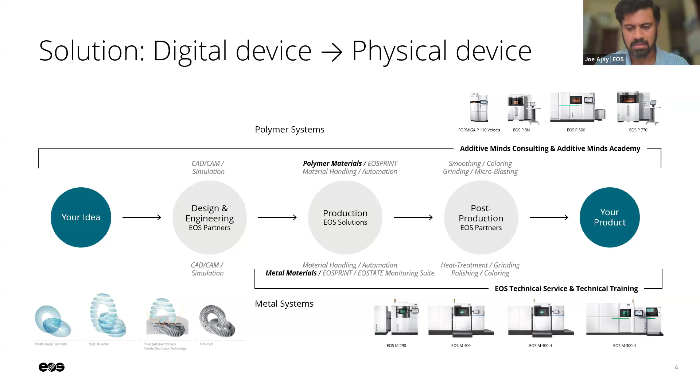Additive manufacturing has been around for quite some time in this industry. There are multiple different technologies, and at EOS we work on laser powder bed fusion. The raw material is in the form of powder. We spread the powder over a platform and use lasers to melt it, and layer by layer we build the product. As simple as that. Sounds simple, but very complex engineering is involved.

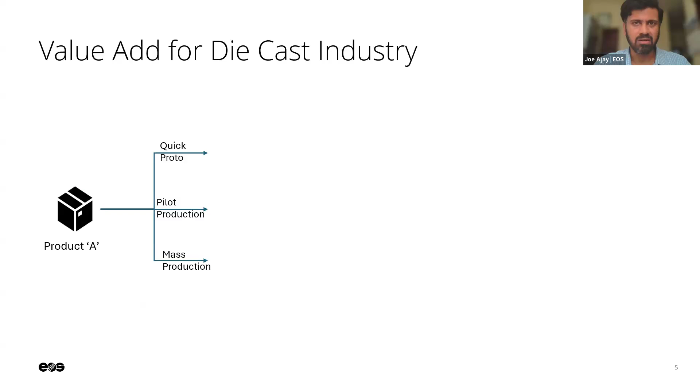For the die casting industry, as today's theme revolves around tooling, when we talk to prospects in the primary interviews we took, they said if there is a product and you want to realize it before it goes into mass volume, the first step is quick protos, where the product is either machined with 6061 aluminum or sandcasted with AlSi7Mg.

At EOS, we have a similar grade of alloys, a variant of AlSi7Mg called F357, A360, and ADC10, A380. Once the product form is realized and fit and finish verified, it goes into the pilot production stage.

Where you have some soft tooling done, whether in P20 steel or any other quick tool, a cheap tool that can make quick die-cast parts for 50 to 100 numbers, again with ADC grade alloys possible.

But today, with EOS, we have very high productive processes for aluminum alloys, A360, and the whole set of grade alloys, where you can eliminate this complete process with the same set of properties as the end-use die-casted parts.

And for mass production, when the volumes run into, let's say, 100,000 parts or about 1 million parts, then we offer tools, or we have processes that work on tool materials where we can have, just with

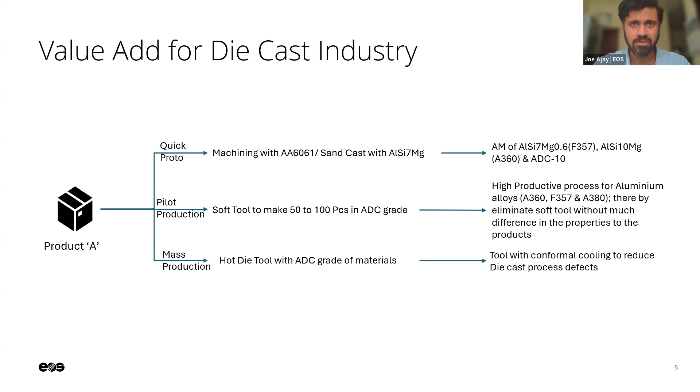our creative mind, we can offer complex cooling channels with the benefit of layer by layer building. And of course, that is the conformal cooling technology.

And for the plastic industry, a similar approach: quick proto, pilot production, and mass production. For quick protos, they take a block and machine it into plastic parts, or else material is extruded, just like the toothpaste kind of technology.

Whereas at EOS, we offer the SLS process where there are no support structures at all. So you just print the part, de-dust it, and then you have a part in hand that you can directly use.

And when it has to be a few hundred numbers, people go for vacuum casting, where you make a soft tool and then pour, mix the polymer, blend it, and pour it into the tool. But in SLS, we can stack the parts in the Z-axis as well.

So quick parts without any support structures, without any wastage, with a quick turnaround time, is what we offer.

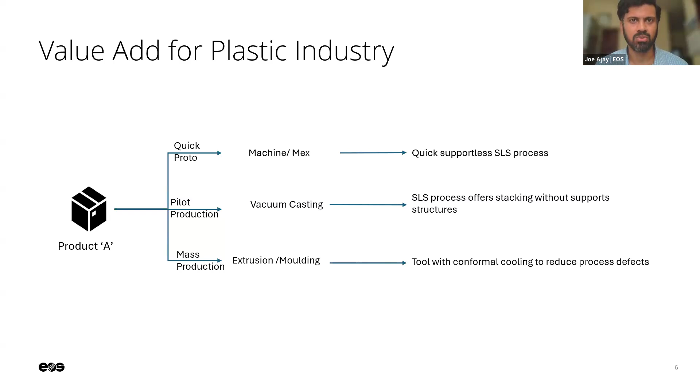And for mass production, we make use of the tooling performance and tooling process parameters. Thereby, we could offer conformal cooling circuits, or conformal cooling technology, for plastic molds as well.

So for direct parts, many times when we talk to people, they ask us how additive manufacturing performs compared to die-casted parts or wrought parts, and so on and so forth. I think the standards speak for themselves.

When we compare with some of the industry standards, such as JIS standards, we saw AlSi7Mg, which is the F357 grade, has direct overlap of these properties.

You can see whether it is sand casted, permanent mold casted, or lost wax method, even with that, the properties overlap. There is a little bit of increase in ductility that by nature comes with the microstructure, which is inherent to the process.

And AlSi10Mg, again with the same standard 5202, shows overlapping of these properties. And recently also

A380, ADC10, I think this is one of the very common alloys in the die-cast industry, where you can have the same part going into mass production being printed and achieve the same properties. So the delta between the proto and the end-use parts is reduced with additive manufacturing, and thereby you have a quick turnaround time as well.

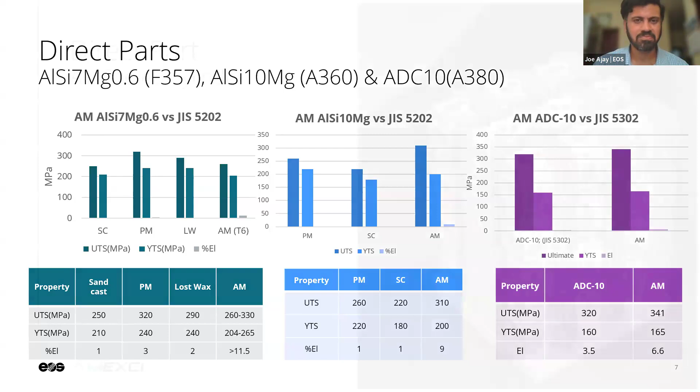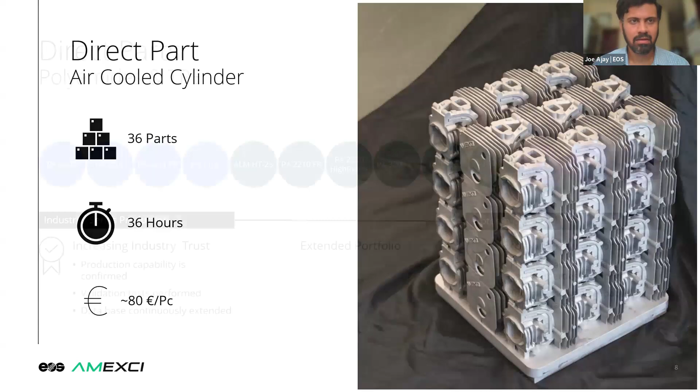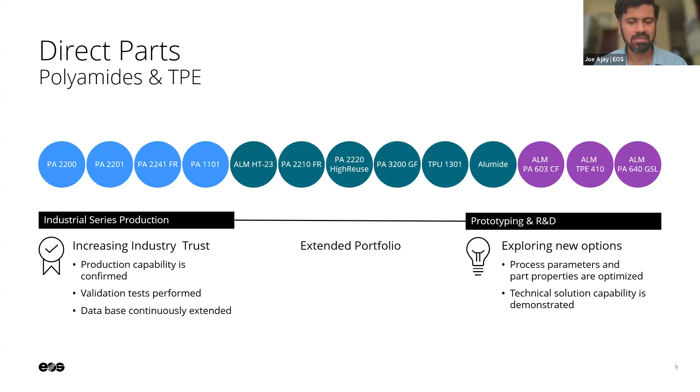On polymer, we predominantly work with polyamides and TPE - various polyamides, nylon 11, nylon 12. We have flame retardancy options, carbon filled material for better flexural strength, glass filled materials for better temperature resistance, and so on. Under the TPE umbrella we have TPU with a fair bit of percentage elongation where you can stretch it and use it for bushings and so on. If you have any specific requirements, we can talk later after this session.

When we compare the properties with the VDA standard for additive manufacturing, our processes and the standards match. Unlike what we see in metal, where we have process-based standards, in polymers we have product-based standards. So we have to compare with products, but fortunately we have the VDA standard for additive manufacturing, which clearly shows our properties such as PA2200 overlap with PA12 and PA11 properties set by the industry standard. PA1101 matches, and so on.

So this is a production case similar to what you saw on the engine casing. Let's say this is a product, a joystick, used for gaming consoles or off-road vehicles and so on. If this part has to be printed in a small series, such as 36 parts or a little lower or higher - about 50 parts or so - we can print 45 of such parts in one full job, and that takes roughly about 2 days of time. That's how quick our process is.

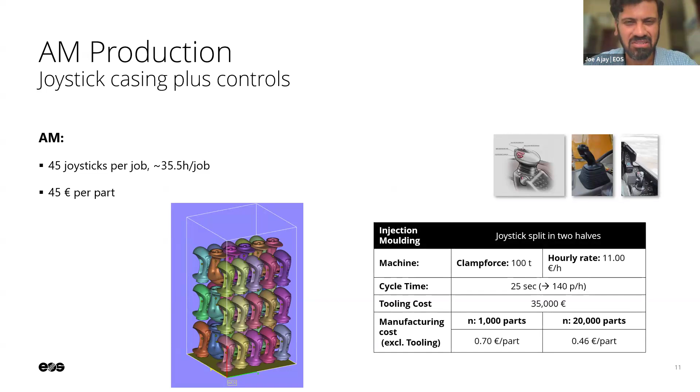If you compare injection molding, the economics is way higher - it doesn't match at all. We're talking somewhere around 45 euros per part, but injection molding costs about 0.7 euro per part. It doesn't match at all. But here is the breakup: for 100 parts, your tooling cost is way higher - it's not even a match.

But if we go to bigger volume numbers, then we can see the economics come into play, where injection molding is far better and cheaper at large volumes. So where exactly is the break-even? We found out that for this particular part it's roughly about 800 pieces. This is geometry to geometry, and we can work on a few cases to understand exactly where the break-even is when comparing injection molding to direct parts with the SLS process.

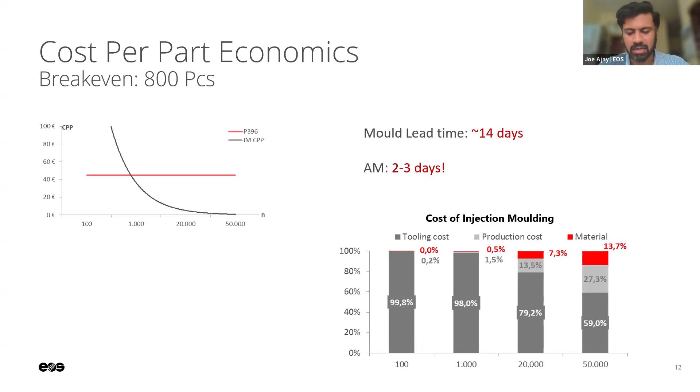So the need for AM tools, coming to the theme of the day - tools. For die casting, this is an interesting survey done by NADCA, the North American Die Casting Association. They say the number one problem faced by die casters is porosity - gas porosity, shrinkage porosity, blisters, and so on. Everything put together contributes about 35% of their product defects, followed by other issues like cracks, solder on the tool, flash, erosion of the tool, and then supplier quality issues like dimensions, CPK values, and finally the least amount of headache is on tool cost.

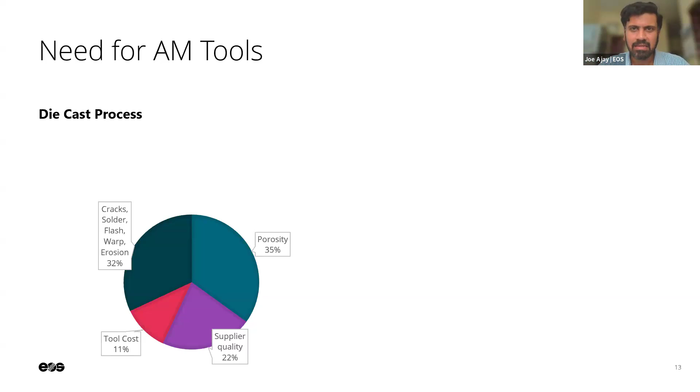Interestingly, if we read through NADCA's book, they say roughly about 50%, more than 50%, of all these defects can be resolved if we have the right tool temperature.

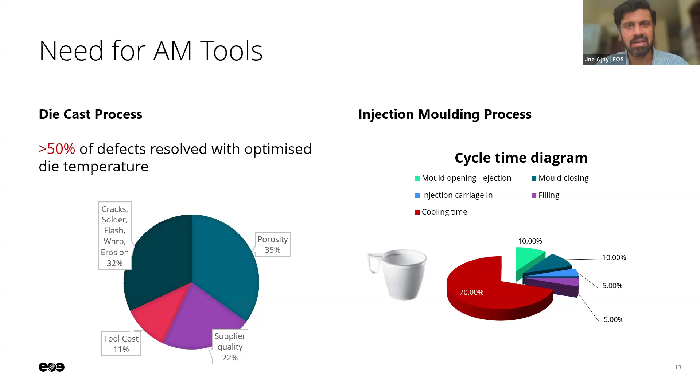In plastics, the game is a little different. We had an assessment with one of our partners for a cup such as this. They say in terms of productivity, if we have to increase volume numbers - because plastic parts go in much higher numbers than die-casted parts - the biggest contributor to non-value-add time is the cooling time. So if we have a quicker turnaround or cooling time, we can get a better ROI for our tool. The solution, of course, is temperature optimization or thermal control, offered by conformal cooling.

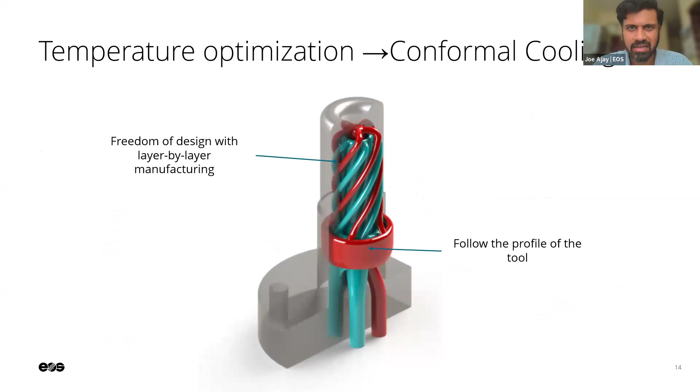The benefit with additive manufacturing is because we do layer by layer, we can achieve whatever shapes we want. Of course, we play within certain design rules, which by nature for any other manufacturing process is inherent.

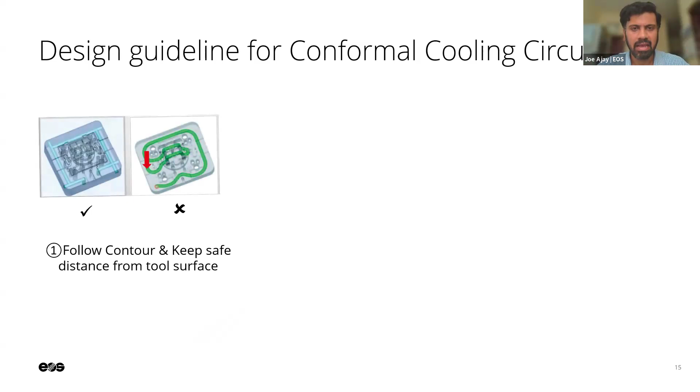People often ask us how to go about designing a conformal cooling circuit. We have three abstract rules. Of course, we go case to case, but upfront, in a nutshell: easily follow the contour of the part and keep a safe distance from the tool surface, followed by not having sharp edges, since we already have enough cleaning issues with existing channels. We don't want cleaning issues again with conformal cooling.

So let's not have blind corners or sharp edges where there could be an issue of clogging or scaling. And finally, let's not have too many branches, which cause pressure losses. Instead, have limited branches but larger channel profiles, thereby achieving better heat removal.

So that being said, we have a few tool steel processes with us. Number one is of course the popular Maraging steel 1.2709, followed by H11. We also have CM55, which is cold work tool steel. We've also tried it with die-casted, works well. And we have Corax for plastic molds. If we compare productivity, we roughly have 100 grams per hour for almost all these materials together.

Which means if you have certain few kgs of parts to be done in a year, you can understand how much utilization you have for an additive manufacturing machine.

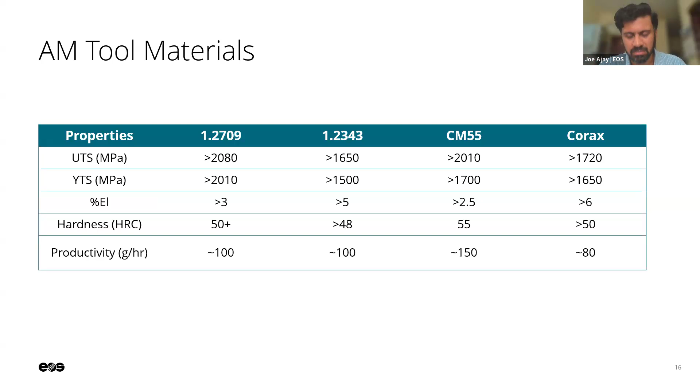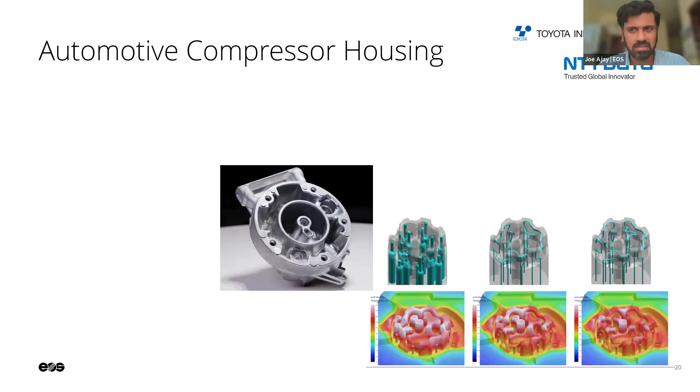So a few stories for inspiration. I like this story very much because this is a very high volume part: an automotive compressor housing done by Toyota along with one of our customer entities, NTT Data, in Japan. They had this issue of soldering of tools - aluminum sticks to the tool and then they have to polish it. There's downtime to it, so on and so forth.

So they tried with deep cooling channels, as you can see in the first image, and then they tried quick preventive maintenance, so on and so forth. But all this could only reduce it to 50% or so - good progress, actually speaking. Now with conformal cooling, they even tried, as you saw earlier, different design guidelines - thin channels, thick channels, so on and so forth.

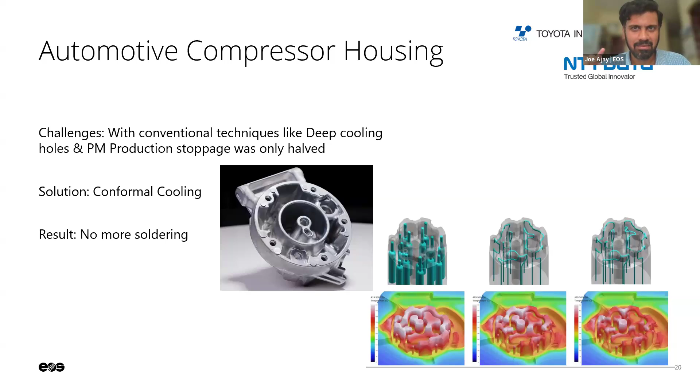And you could see with the designed conformal cooling, they had zero soldering. From 50% onwards, they actually came up with no more soldering. The tool doesn't stop for soldering's sake, no more polishing.

So this is my last success story from injection molding. This is a part used for some cosmetic applications, and they had the issue of wobbling temperature going up and down at the injection point, which effectively carried over to the part, causing gas pores, warpage, and whatnot. Every defect you could see has an issue when you don't have the right temperature of entry for plastics.

Now, in order to reduce cost, what we've done is take a preformed maraging steel 1.2709, machined it, and made it suitable such as what you see here, so that the drills are just straight drills. After that, once you have the profile, you just build on only the profile where you need the conformal cooling circuit. That's what we did.

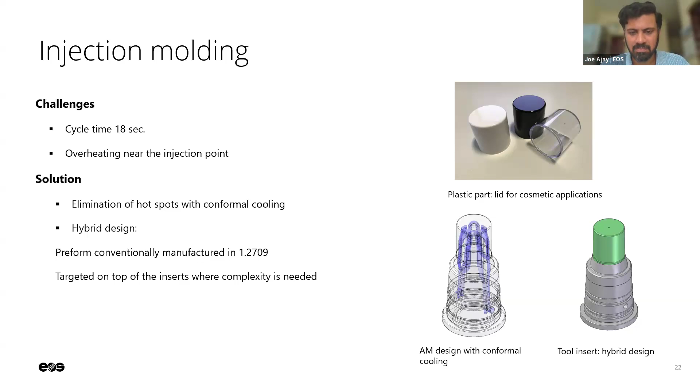So from 18 seconds, the cooling time or cycle time has come down to 10 seconds. That's the benefit of it.

Due to the hybrid manufacturing, where we have the half pre-machined block and then a printed block, we could reduce cost. And even with the tool setup time or machine setup time, we had some unique tools in our machine for quick positioning, which reduced the turnaround time or print time. Today we've achieved more than 3 million shots with this tool.

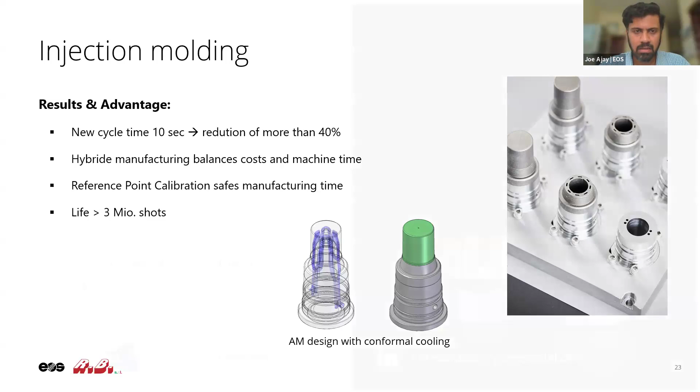So that's about it. For takeaway, I would like to leave with three points. First, we offer something beyond proto - additive manufacturing is not just proto parts, but we offer a bridge between proto and mass production. And even with pilot production parts, we offer the same or similar properties as end-use die-casted parts or end-use injection molded parts, as you saw from the standards.

Finally, with AM tools, you have better tool life, reduced defects, and you can increase your productivity. So that's about it, and I believe we can take up questions at the end, Darshana.

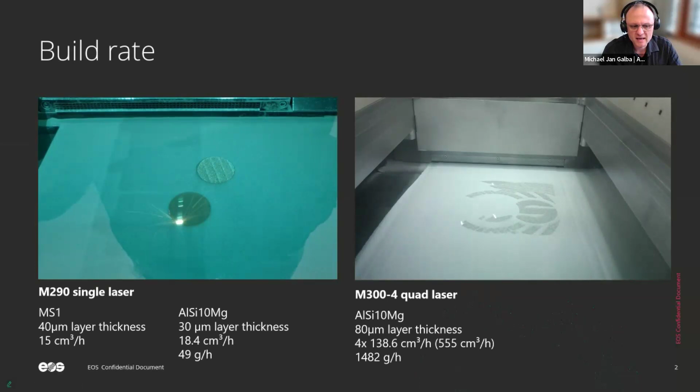This ultimately led to really high costs in additive manufacturing, whether it was in the tool itself or in additive manufactured parts. With new technological advancements, the processing speed was overcome dramatically. We have mastered, with new exposure parameters, the energy input and the interaction between the powder and the laser source in a way that we can, on our latest machine generations, produce over 1 kilogram of material per hour.

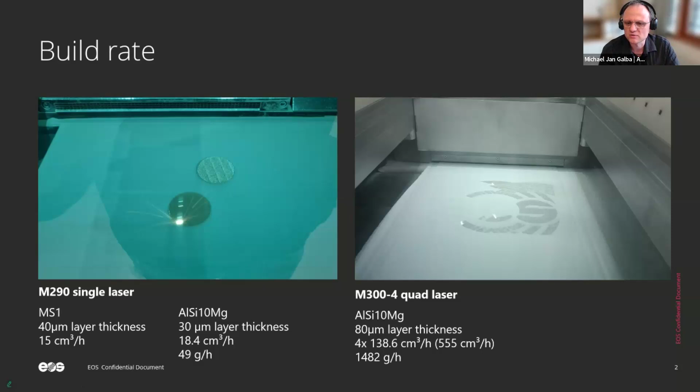So looking back, the tool costs were predominantly defined by the processing time inside our equipment. I think today, as I will also show a little bit later with application samples, the main cost driver is not really the productivity anymore - it is really the material and the availability of the right materials for a specific application.

Here's one quick example: our state-of-the-art M300 system. It's equipped with 4 times 1 kilowatt laser systems, and we're able to deliver 4 times 1 kilowatt in a relatively small process chamber. The process chamber is only 300 by 300 by 400 millimeters in height. Having 4 kilowatts of light power inside such an enclosed space puts a lot of stress on the entire system, but the system architecture is prepared for it.

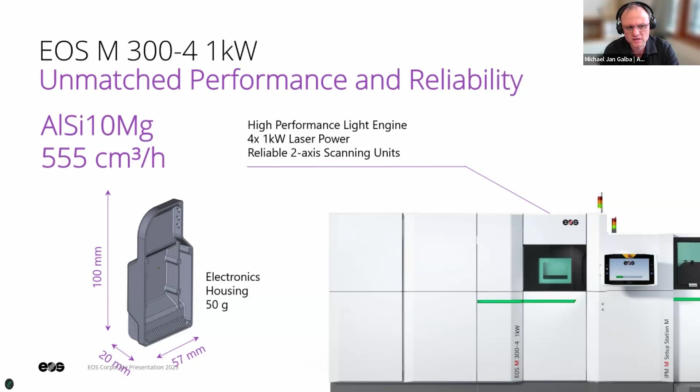We've demonstrated with aluminum and other materials that we can easily handle that, setting us apart by realizing part geometries at production speeds unmatched before. I brought a small electronic housing, about 50 grams, manufactured in AlSi10Mg, which serves as a placeholder for the standard common aluminum alloys. Whether you're using AlSi10Mg or AlSi9Cu3, the productivities are pretty much the same across those systems or similar ranges.

To put that into perspective cost-wise, where we come from on the M290 system: with an undiscounted system price, undiscounted material, all at list price, a depreciation period of about 5 or 7 years, and 6,500 laser hours of utilization, the cost per part was in the range of 66 dollars and 17 cents, additively manufactured.

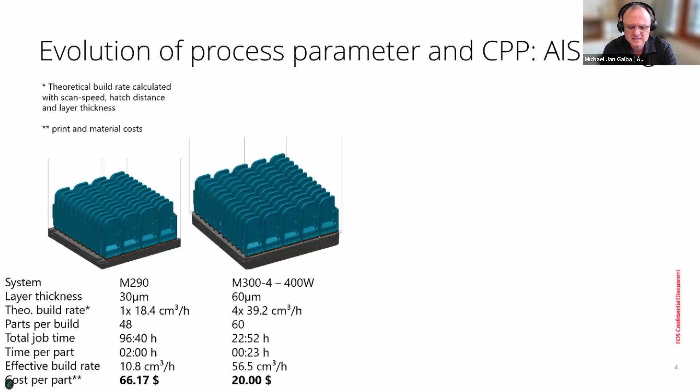The way forward was to develop new process parameters and go into higher layer thicknesses. On the M300 with the 400 watt laser system, we were able to drop that cost already dramatically. With the M300 4x1 kilowatt system, ultimately, we were able to cut down the cost really, really dramatically.

Producing over 240 parts in a stacked configuration in about a day's time is really enormous. I've come from a period where printing aluminum parts was always in the range of a few days, and with a full platform, you'd be waiting almost a week until the part could be unpacked. Today, this is, to me personally, as close to a replicator technology from Star Trek as you can get.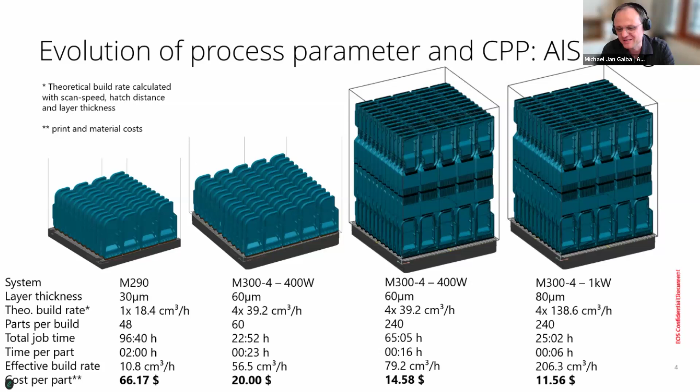So part times of 16 minutes or 6 minutes have become really relevant.

But this is not the end yet. We at EOS have been constantly pushing the boundaries of what's possible. From the very early days, we thought we don't want to join the laser race, with everyone asking who has a machine with the most possible scan heads. We don't believe this is the smartest way forward.

The laser scanner optic components are amongst the most expensive and most sensitive components in an additive manufacturing machine. So by putting 8, 20, or 30 lasers into a system, you're only increasing the complexity. We at EOS believe there are other means to increase productivity further, not by adding more lasers, but by adding different beam shapes.

We also strongly believe you need dedicated and specific tools to solve a specific problem. As an analogy, if you have a broken car and bring it to a dealer, the dealer has many different tools to fix the problem. In additive manufacturing, the tool of choice was always a hammer—whether a 400 watt hammer, a 1 kilowatt hammer, or a 2 kilowatt hammer, a hammer stays a hammer. It's not the optimized solution or tool to fix a specific problem.

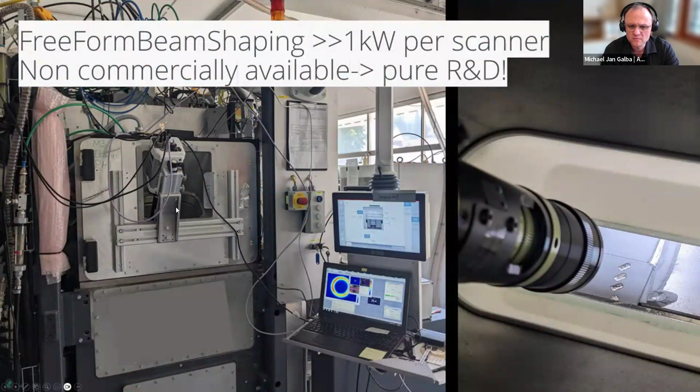It's a scientific machine with a high-speed recording camera here that can take up to 2,000 pictures per second of a small envelope, and that teaches us how the energy source interacts with the powder.

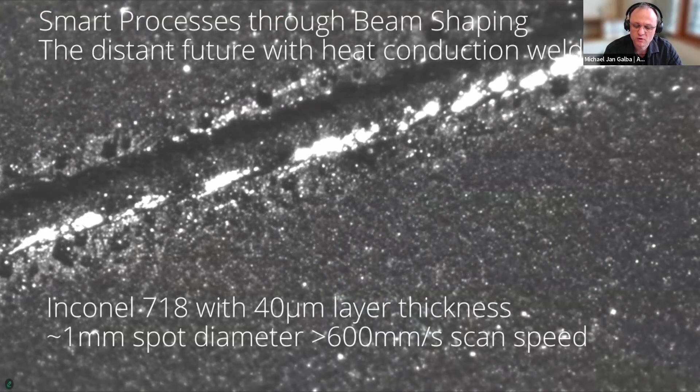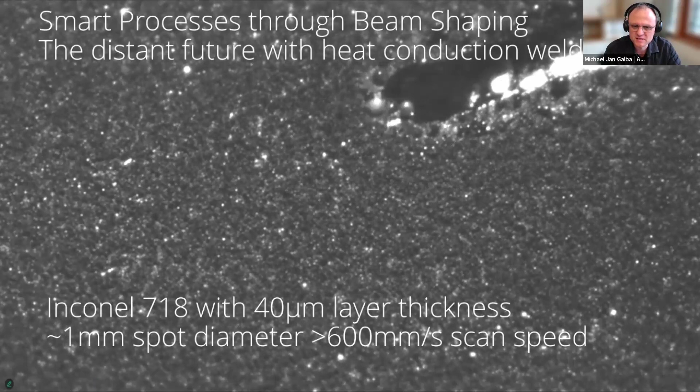What's brought here is an experiment we conducted a while ago, published on LinkedIn about 3 years ago, where we demonstrated heat conduction welding at really high scan speeds with 1 millimeter spot diameters. Typically in additive manufacturing, to melt metal you use an 80 or 100 micron Gauss beam, meaning for a 1 millimeter width you need about 10 individual scan lines. With this technology, we've increased productivity by a factor of 8 to 10 by scanning just 1 line instead of 10.

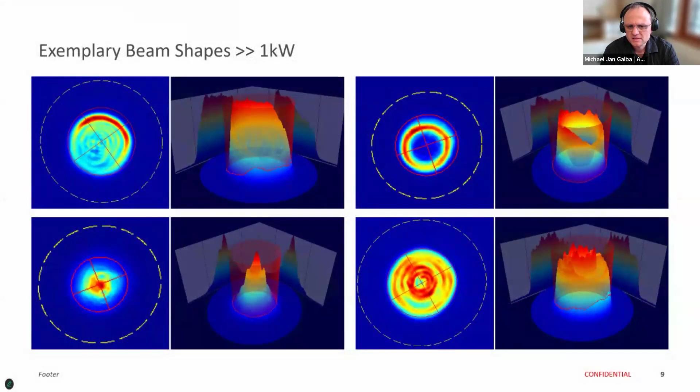Charmingly, this heat conduction welding process does not emit any side products. What you see here is a very clean melting of the material, not a laser welding process where you have spatters flying around causing disturbances. Here we've tried different beam shapes and how they interact with the powder, all showing a very different melting behavior.

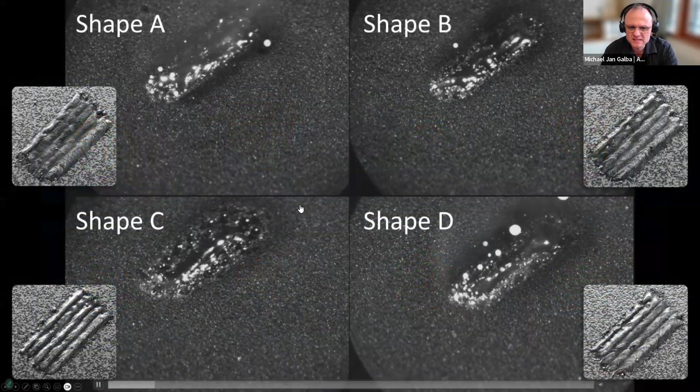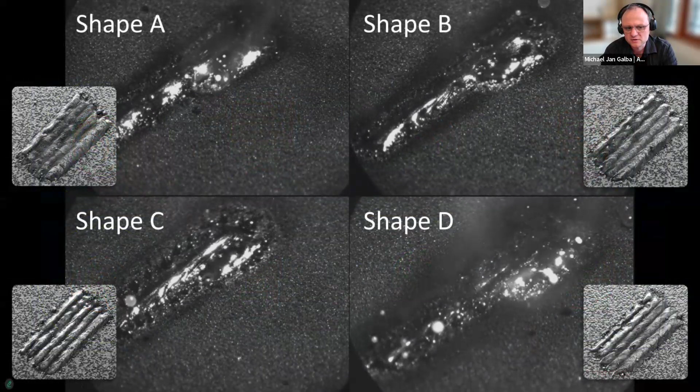I don't want to go too deep into the physics. Just keep in mind that different beam shapes have a significant impact on how we can melt the material together. This is research, nice and good that we're doing that, but you need to also apply it to technologies.

One of the first systems where we applied beam shaping was with our partner nLIGHT, equipping an M290 system with a 1.2 kilowatt AFX laser. That laser lets you change within milliseconds from a Gauss beam into, for instance, a ring mode, a multi-mode laser profile. We've also equipped our M300 system with the latest scanner technology and 4 times 1.5 kilowatt laser energy, unleashing 6 kilowatts of light into a very small process chamber.

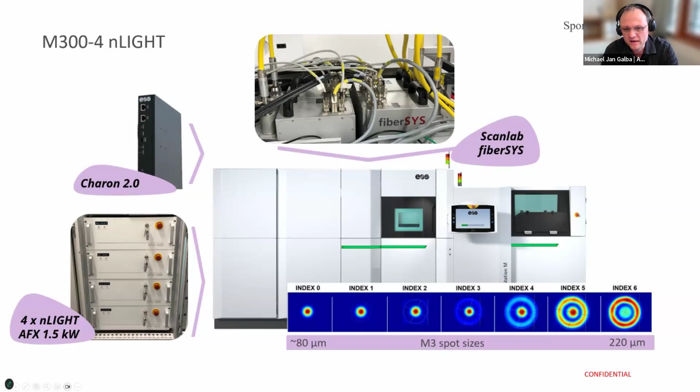The results are very impressive. When we go to the applications, you can see on the right-hand side this is a quad laser system, but just for demonstrational purposes, one laser is producing with a conventional 80 micron Gauss beam, and one laser is using the full 1.2 or 1.3 kilowatts in Inconel 718, a high performance super alloy, resulting in a significantly higher amount of material molten and at the same time better quality.

As I initially showed, there are fewer process spatters and side products emitted. Here, after a while, I'll just forward the video. The Gauss beam is still operational, while the nLIGHT AFX laser is already done with all the melting. Look at the top surface of the melt, it's completely clean, no debris, no spatter in the powder bed, no overmolten particles being deposited that could alter product quality. Also, recoating is a lot smoother in the beam shape process.

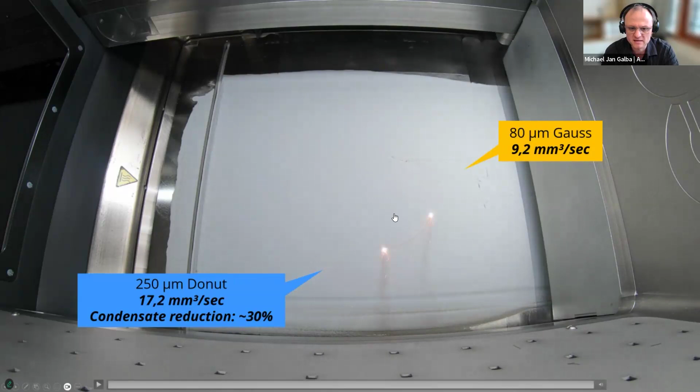Here's a clear application where we printed with 4 times 1.3 kilowatt process parameters. You see the layer time has become really short. It's a huge part that has been printed.

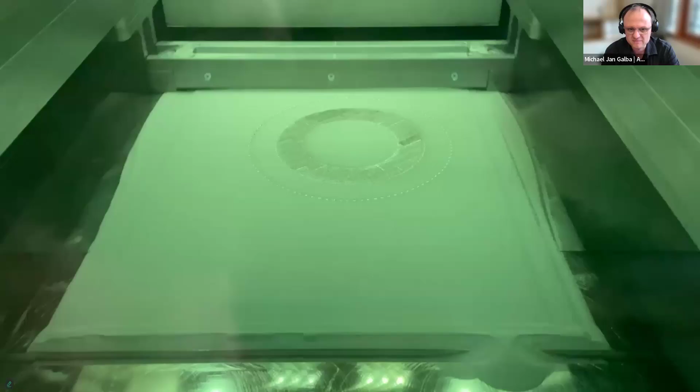Another application I want to show is a car part with our partner Danfoss, a stainless steel component with a conventional legacy design. This part was subtractively cut from bar stock material, drilled and threaded. With optimization, we can even today with the existing design match the part production cost using a superior material compared to stainless steel, which is really interesting.

In conversation, the customer told us the design itself is 30 years old and has a lot of room for improvement, with a lot of additional mass in the object, simply because removing mass from the existing design was adding cost, whereas in additive manufacturing the more mass you produce, the more expensive the part gets. So we're working with the customer to optimize the design, reduce mass where possible, and improve the performance of the component through internal geometries and cavities. As reverse engineers, we've simulated the passage through this rotary piston pump component.

So we were able to reduce the mass. We were able to, with the customer together, make a part that is better than today in a superior material for less cost than traditional manufacturing. Again, here, it was displayed this year on Formnext, this component.

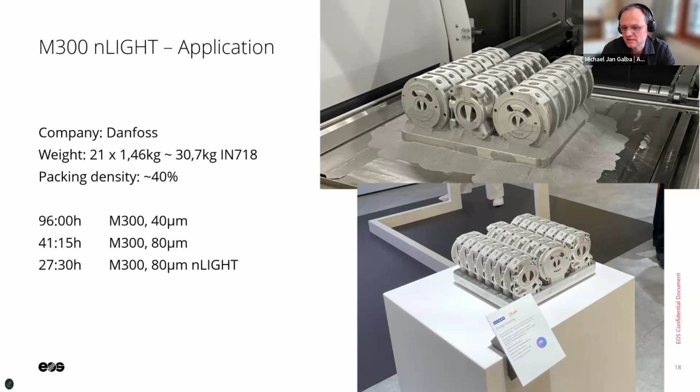Now, do we have that already available for tool steel? Unfortunately not, but we are working on it. So tool steels are on our agenda because they have a lot of mass and require significantly shorter processing times. This is something we will be considering in the near future.

Now I want to bring you another application example from our partner Husqvarna, who were so kind as to demonstrate a challenging part for us. So here you can see where we came from.

From the past, on the M290 system with a legacy process in 2011. This was clearly prototyping. You were able to produce 4 parts in a little over 2 days, and the resulting part price was in a range so far from conventional manufacturing that the application never really made sense.

We asked the customer, can you modify the design to make it better for additive manufacturing, integrate functional integration, topology optimization, and so on? They said we are so far away from a target application price of about 20 to 40 euros for these chainsaws that it doesn't make sense economically to waste even a minute of engineering time optimizing for additive manufacturing, because it will never go at this price into an additive manufacturing realm. We said, okay, it's fine.

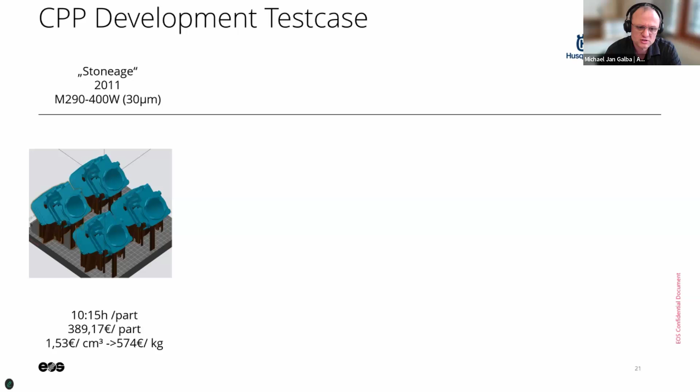We continued developing the technology, and as my colleague Joey demonstrated, we started with 80-micron processes that let us manufacture these components in a stacked manner for about 80 to 90 euros per component, or around 120 to 130 euros per kilogram. In this region, we were already closer to the manufacturing cost of the die-cast component.

The customer got really interested in working with us to optimize this even further. So instead of the little chainsaw for the little Michael Galba doing his gardening work - and that future will be electric - those millions of die-cast parts will eventually not be required anymore.

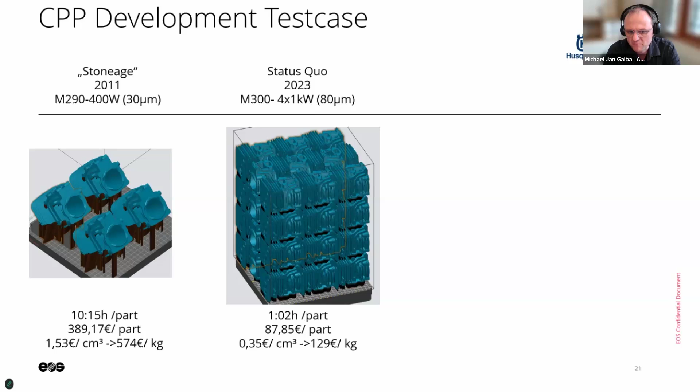But there are applications where professional woodworkers carry a chainsaw 8, 10, 12 hours through the forest cutting down trees. For them, performance really matters. Those components can be a little more expensive, but also optimized for weight and performance.

This is what we've demonstrated with Husqvarna, with the M4 Next - a machine we are currently developing that's coming to market this year at Formnext - where we've dropped the part cost quite dramatically, along with productivity per part.

And now, looking also at beam shaping technologies in this, we can reach part prices comparable to real die-cast aluminum parts in the range of, let's say, 8 to maybe 10,000 components per year.

So coming from over 500 euros per kilogram down to about 100 euros per kilogram is, I think, a very dramatic achievement. However, keep in mind this is all list price of the system, list price of the powder, list price of the associated services.

I want to also demonstrate how big the influence of the powder price is on the specific part price. We'll quickly see that the powder price, between 40 and 45 euros list price for the aluminum, is really the dominating factor in the part price itself.

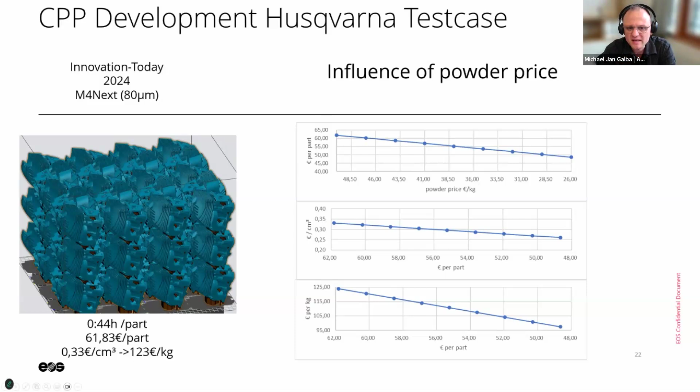As a matter of fact, the machine time, if you have such high productivities, doesn't play such an important role anymore. Same with machine utilization - the utilization of the system is becoming higher and higher.

Today, typically in a prototyping environment, you have machine utilizations of only a few thousand laser hours per year. In a real production scenario, you have to consider utilizations of the system over 6,500 to 7,000 laser hours - that's industry standard. Those have a really dominant effect as well on the part cost and on system productivity.

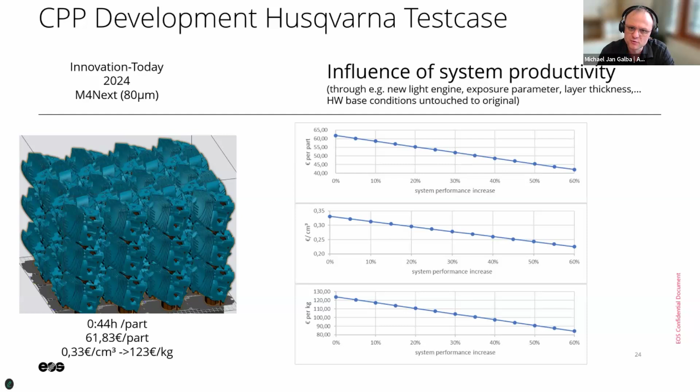Through process innovations, we are able to deliver more and more power into the process chamber. And we believe that a system's performance increase of 50 to 60% in the near future can become realistic.

Going back again to this innovation, looking toward future scenarios, considering an increase in productivity of about 20%, a reduction of powder price by about 30%, and high utilization, we can really dramatically bring the part price down into regions where additive manufacturing of the final part starts to make great sense. And with that, I want to conclude my presentation. Please, if you have any questions, let me know, and I'd be happy to answer all of those.

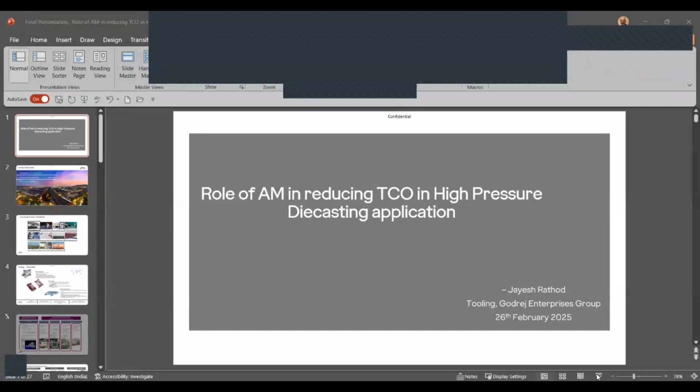Good evening, everyone. I'm Jayesh Rathod. I'm heading die casting dies at Tooling SBU of Godrej Enterprises Group. It's a pleasure to see such a large and engaged audience joining us from various industries, and it seems they are keen to know more about additive manufacturing. I would like to express my sincere gratitude to OEM Update magazine, Phillips Additive, and EOS for providing me this opportunity to share our experience in applying AM in die casting dies. I would like to begin my presentation with a short introduction of my esteemed organization.

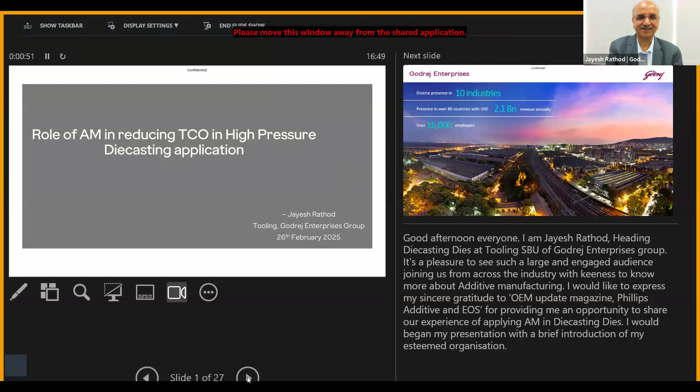Sorry, you are sharing the wrong slide. Can you put it in presentation mode? One second. Are you able to see clearly now? Sir, we can see. Now it's perfect, sir. Wonderful, okay, sorry.

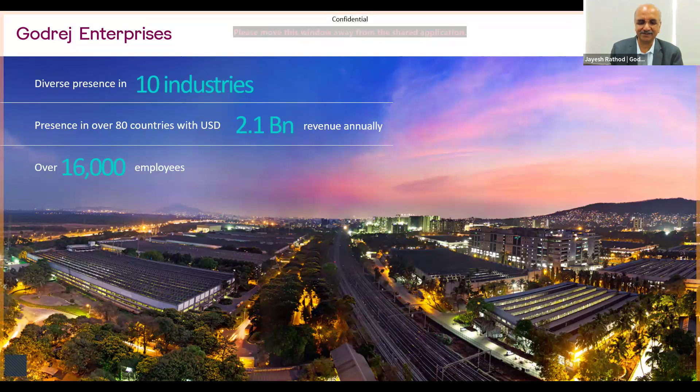In India, Godrej is the largest privately owned company, existing since 127 years. It is known for a rich legacy of strong value systems: integrity, trust, respect, customer centricity, entrepreneurship, and environmental stewardship. Tooling is one of the SBUs of this large business house.

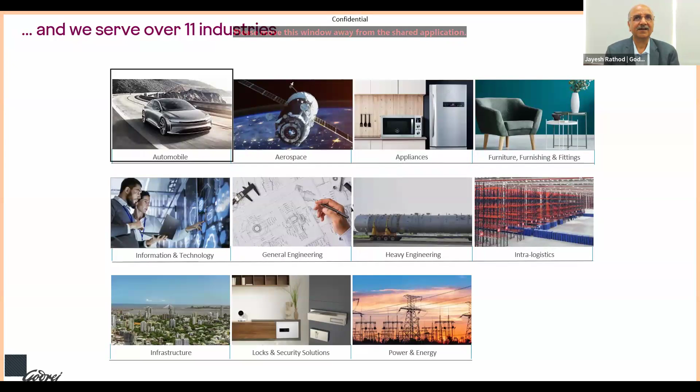Godrej is a multi-product and multi-industry sector leader, serving a very diversified portfolio across B2C and B2B segments. We have a total of 14 SBUs, and we are leaders in their respective areas.

Coming to tooling, we serve the automobile industry majorly, and also the non-auto industry. We offer complete solutions to all OEMs and their part producers through die casting dies, stamping tools, and industrial machines.

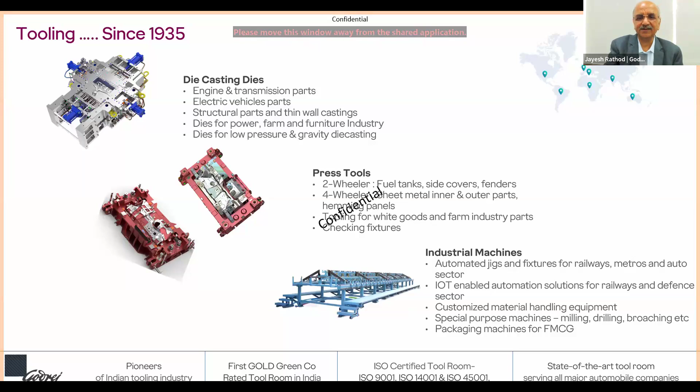This is in brief about our product portfolio with respect to die casting dies. We have a capacity to make more than 300 dies per year, and we offer the lowest TCO to all our customers with superior build quality and superior engineered dies, providing better value for money till the end of life of the dies.

Coming to the TCO concept, we are a forward-looking organization and seek to implement the latest technology in all our products and processes. We come across many relevant and irrelevant, feasible and unfeasible, viable and unviable proposals, and we pursue the ones that pass through our multiple lenses of strategic, futuristic, technical, and commercial evaluation.

Today we will discuss the concept of TCO. TCO, as you are aware, but just to recap shortly, is the overall cost of products and services throughout its life cycle. Both direct and indirect costs need to be considered here.

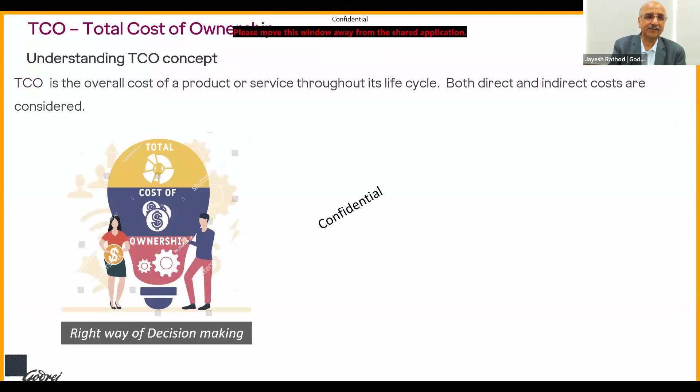So it's a correct way of making decisions when you are planning for buying any equipment. I'm sure everyone is aware about direct cost. With respect to die casting, it is the cost of the tool, and indirect cost, which are hidden costs.

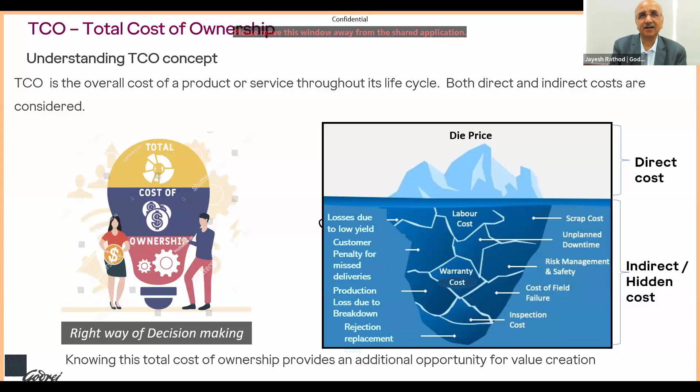That is because of low yield, or higher scrap cost, or part rejections, cost of field failure. All this adds to the cost which we are not calculating when we are planning to make any investment with respect to tooling.

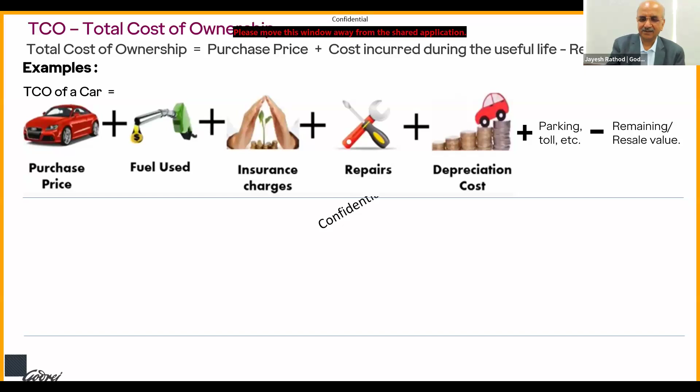So to understand the concept in a simpler way, when we own a car, with respect to TCO we should be looking at purchase price of the car, then cost incurred during its useful life - fuel used, insurance charges, repairs, depreciation cost, plus parking, toll, etc., and finally the remaining or resale value. That is the total cost of ownership.

In manufacturing industry, it is again initial cost of acquiring equipment, then cost of operation, cost of maintenance, cost of downtime, cost of production, and whatever scrap value is there. From this we derive the total cost of ownership.

When we look through this lens, we come to know whether the initial proposal we thought was good is really good with respect to TCO, because the purchase price may look lucrative, but if we calculate the hidden cost, we will come to know that it is not the best decision with respect to TCO.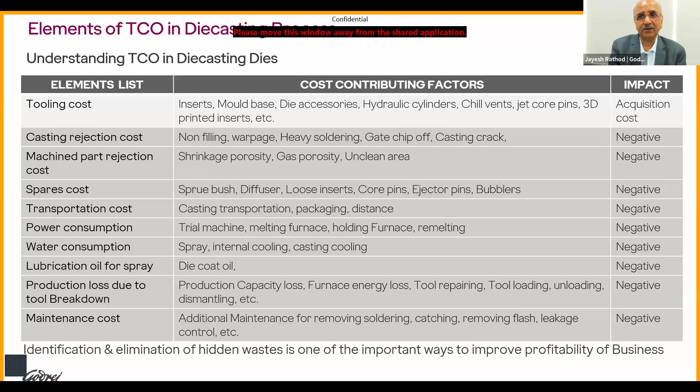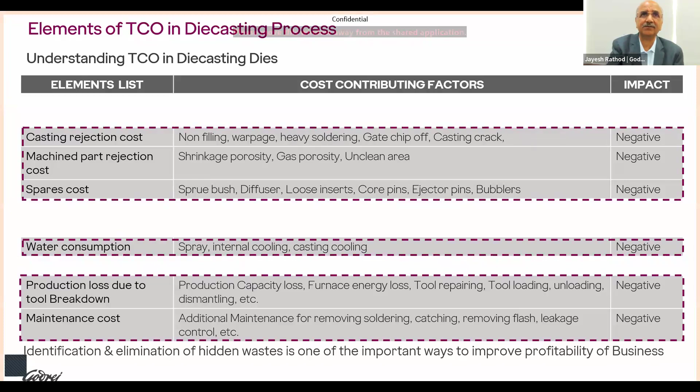All these cost contributing factors should be looked into detail, and we will see that most of these cost elements are having a negative impact on total cost of ownership. So we should be very careful about these elements. Here I shortlisted a few elements where the cost contributing factors majorly affect the total cost of ownership.

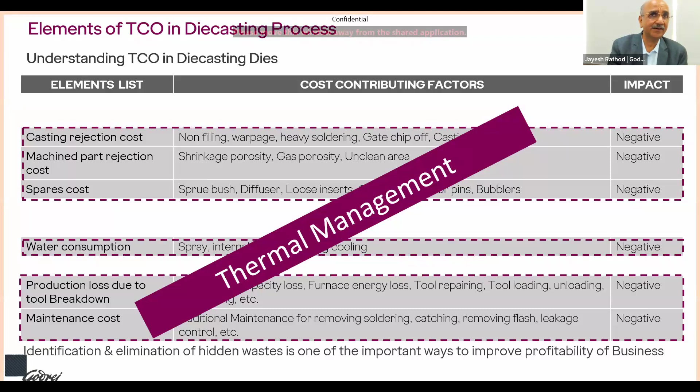If we go into detail one by one, it indicates that casting rejection occurs mainly because of thermal management. As informed by Joe through a study by NADCA, porosity is the major cause of rejection, and porosity is influenced by thermal management, besides many other things. Thermal management has a very important influence on the rejection of castings.

If we try to understand how the high pressure die casting operation happens, in a shift, if 150 parts are being produced on average, it goes through a thermal cycle ranging from 150 degrees centigrade to around 520, sometimes reaching 600 degrees centigrade, and the cycle time is hardly 150 seconds.

Because of this huge temperature fluctuation, the condition of the die steel remains very challenging because it affects the yield strength of the tool steel. This temperature gradient affects the life of the tool, and also the casting which comes out from this is affected.

When the tool steel comes in contact with the very high temperature of the aluminum material, on the surface the temperature increases, while on the core the temperature is not passed on so much. Because of this, there will be compressive and tensile stresses in the same section of the die, and this affects the die life.

So as a tool maker, what we do is understand the impact of thermal cycle on each die element. We design the thermal circuit by taking help of empirical formulas and also validating through simulation software.

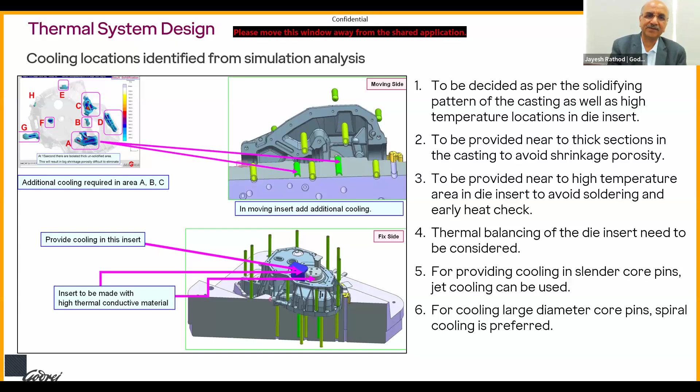If we go deeper into thermal system design, there are 4 types of thermal system designs, and I'll take you briefly through them. One is the very conventional line and spot cooling, where temperature controlling holes are drilled as straight holes, and hot oil or water is circulated to maintain the temperature.

Whenever there are thin round pins, we go for jet cooling, because normal cooling circuits will not be applicable here. Jet cooling holes in the range of 3 to 4 millimeters, and in that we inject water along with air, and then we try to control the temperature.

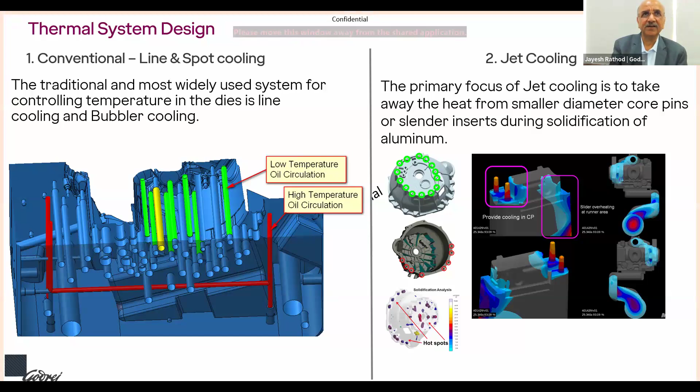There is another method called intermittent cooling. Here the cooling is started and stopped. You can see how the temperature is affected when it is continuously cooled versus when interval cooling is used. We can see a difference in temperature of around 70 degrees centigrade. This helps us maintain the thermal profile of the die insert when the casting is being produced.

The next is conformal cooling. As indicated by Joe and Michael, here 3D printing technology, that is additive manufacturing, is used. We try to bring the cooling channels as close to the outer surface of the insert as possible, so that cooling happens very effectively, and we are able to maintain the required thermal profile of the part, so that any rejection due to shrinkage, porosity and soldering can be avoided.

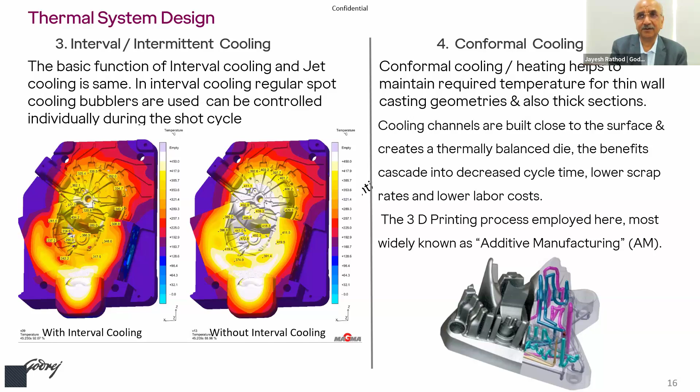So conformal cooling, how it can be deployed. If you look at the advantages of 3D printing or additive manufacturing in tool making, or in the part making industry overall, the first thing is not only the cooling cycle, but also the complex geometry.

Next is about rapid prototyping. Both panelists have already indicated and talked in depth about rapid prototyping. Many times a die element breaks, and to restore it takes a longer time for manufacturing a new insert. It can immediately be built up using additive manufacturing, and the broken portion can be made at a much faster pace, so you can restart your production cycle as early as possible.

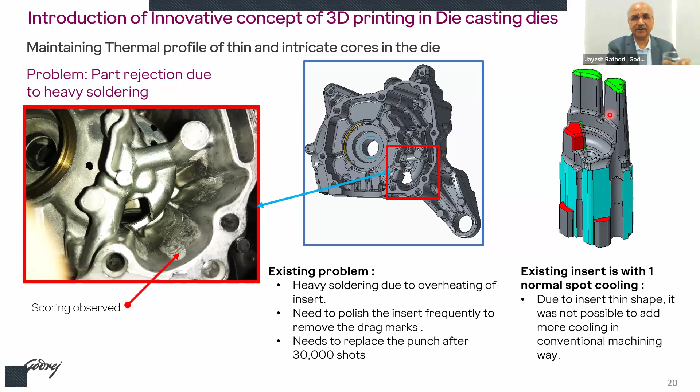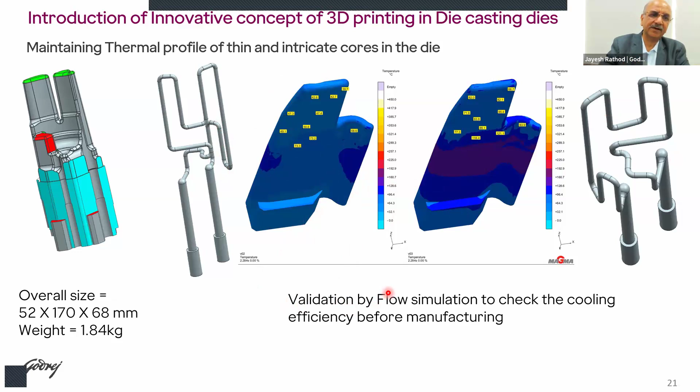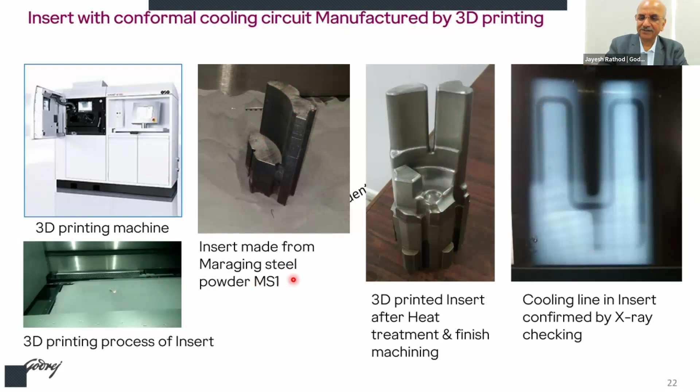This is the machine which has been used for making this 3D printed insert. This is after additive manufacturing, the piece looks like this, and after the final finish machining, it looks like this. So with this, the insert has been made, but our story doesn't end here.

Now we have to actually test it, like whatever we have seen in theory, to see what type of benefit we get. So we made a case study: with a regular insert normally used, the average temperature was 270 degrees centigrade in this area, whereas with the 3D printed insert, it came down to 180 degrees centigrade. Because of this temperature difference, the soldering problem has been resolved due to good thermal efficiency.

So with the conventional method, this was the problem I had indicated. Using the 3D printed insert, the advantage was that there was no scoring observed throughout the life of the punch, and punch life increased by 3 times, lasting till the complete die life of the entire die.

And of course, there is a cost attached to it - it is 2.5 times more than the regular piece we would have made. But there is a minimum 8% increase in production per shift. So you can calculate how much additional production is achieved, since disadvantages like soldering, regular polishing, and component rejection due to soldering are all avoided. Cycle time has reduced, and we're able to provide a good, trouble-free die casting die to our customers.

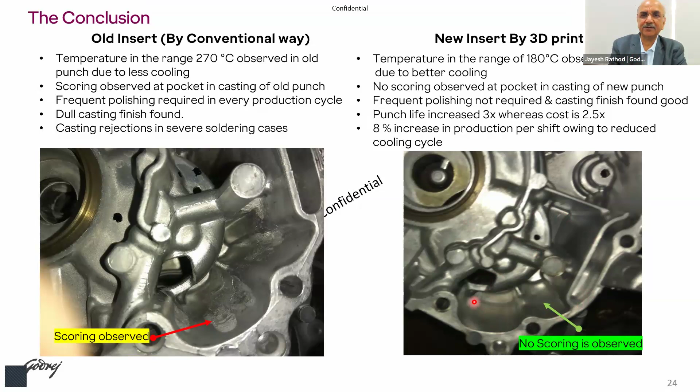In a nutshell, looking at the advantages: cost saving, as I indicated - even though the initial investment cost appears more when looking at TCO, the running cost and associated savings, if calculated together, show this AM technology is a winner in the die casting area.

Also, we should be mindful that we are conserving natural resources and contributing to the environment. For example, with 1 ton of H13 block, in a conventional way the rate would be around 850 rupees per kg. We remove around 400 kg of material just to get the profile, and that 400 kg of scrap actually sells at only 30 rupees per kg as waste.

With additive manufacturing, what you make is what you want. Only the required material is built up, with small allowances kept for finish machining. So you conserve the natural resource of iron, the energy required to remove so much material from the solid block, and you generate material savings for yourself too - cost-wise this gives an advantage.

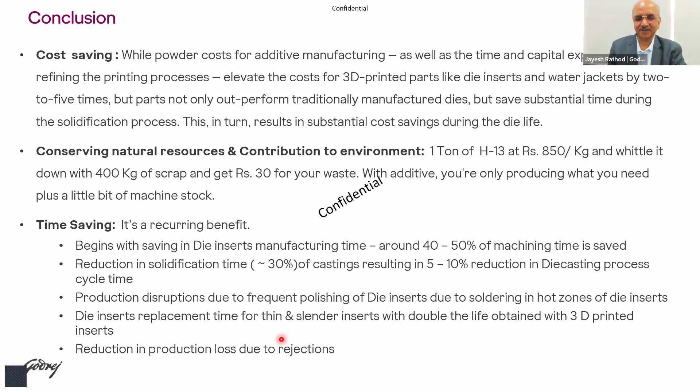It cannot be used in each and every area, but wherever we are able to justify the initial investment and see the benefit exceeding that investment, then definitely we should be able to use this technology. So ultimately, once you invest in a 3D printed insert, recurring savings or advantages can come to the die caster. So this is what I wanted to share with you. Thank you very much for your attention.